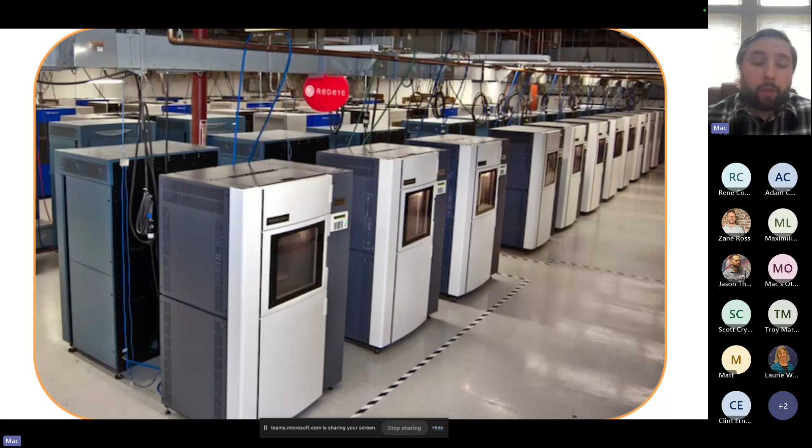So just kind of going through some of the interesting applications that I was fortunate enough to see and work on, from automotive bodies that were used in actual cars to break records of efficiency, seeing the first 3D printed castle, which was about 15 years ago over in Excelsior, Minnesota, from very large and very small products, bone structures, big fun display models, a 3D printed gun in which the majority of the components were 3D printed and have printed shot hundreds and hundreds of rounds, furniture, medical models, casting molds, robotics, full color biological products and consumer products.

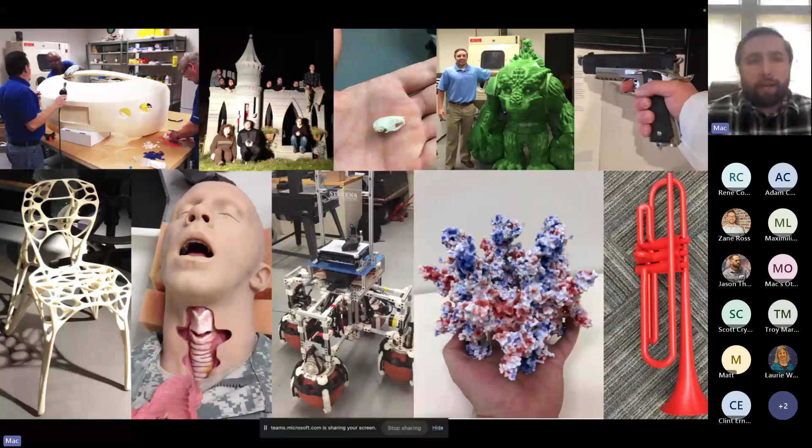So I felt like I had a really amazing opportunity to see and explore and work on different applications that, and really just learn how they were made.

To summarize the benefits of additive manufacturing, I'm sure many of you guys could come up with these as well, but for the past decade it's been: design flexibility, rapid prototyping, customization, waste reduction, toolless manufacturing.

An application of 3D printing that I always wanted to see was mass customization—the ability to launch huge amounts of customizable products at scale, and really just make it easier for the average designer or company to take advantage of this.

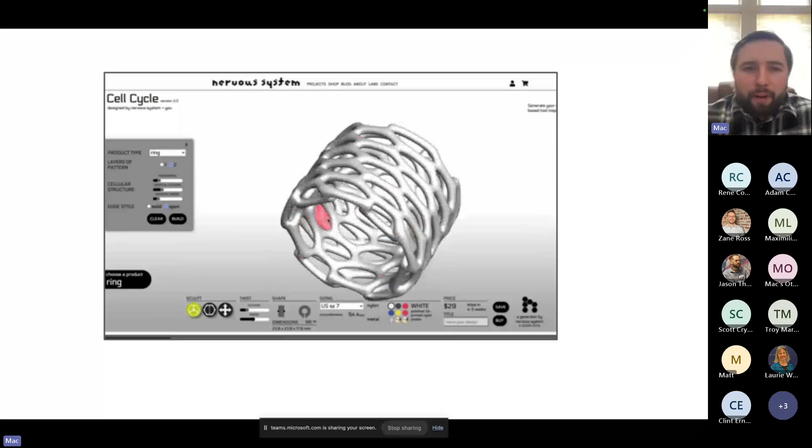One of the very early applications that inspired me to know this was possible was a group called Nervous System. This was a husband and wife out of MIT doing research, creating really interesting software that inspired me to see, wow, this really is possible.

In this model, we're seeing the modification of a few slider bars, and the model is entirely changing. It's got this organic shape, but the whole concept is you could have hundreds of thousands, trillions of combinations of this product. Everything is 3D printable, everything can be manufactured on demand.

With a little more power behind this, the price could actually change in real time, so you have this ability. I learned a bit more about this, and it turns out this is very complex to actually launch—it's not as though anybody can go in here and launch this. These were programmed products from scratch.

So I did a little more research. I was learning about the opportunities in the field and really wanted to dig into the design software, learning everything I could about the different design softwares out there.

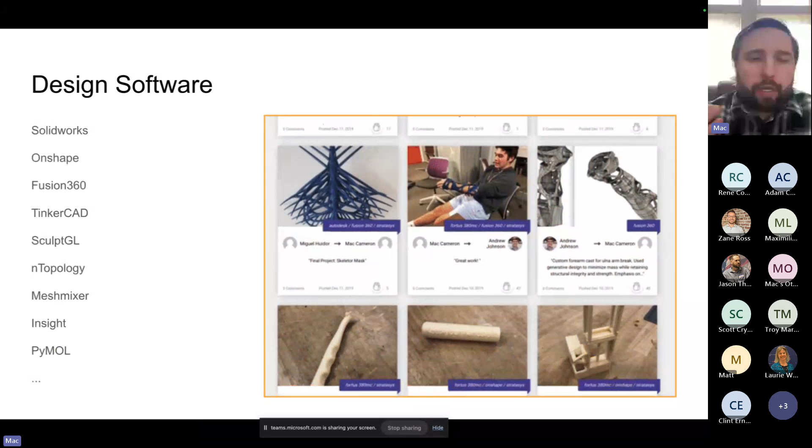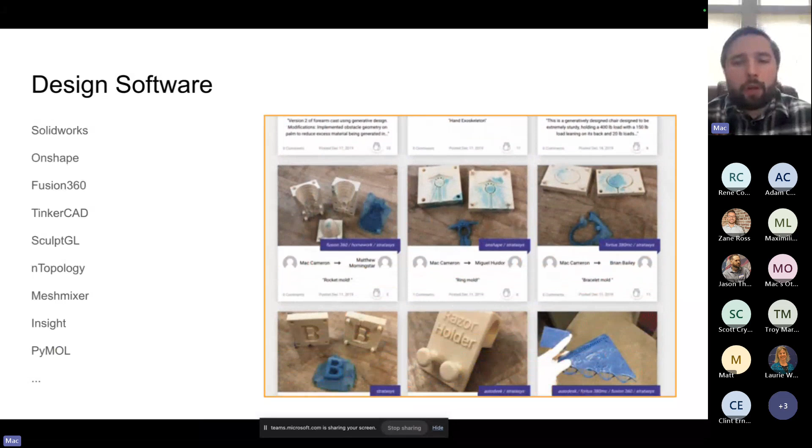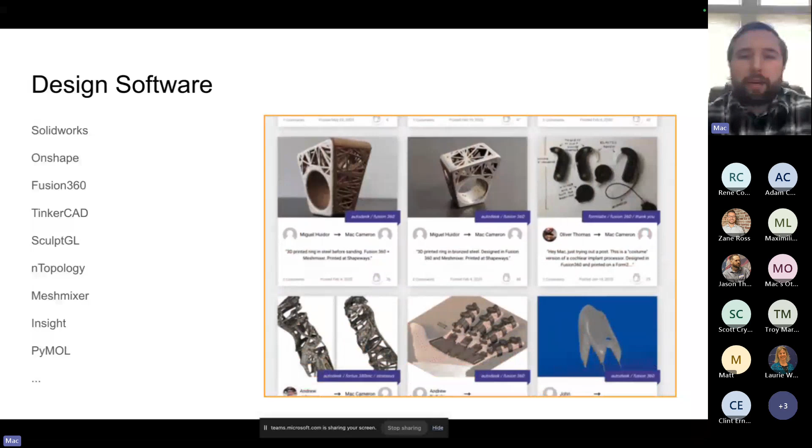I was in Boston at the time, and I had the opportunity to teach a design for 3D printing class at MIT, a semester-long course open to anybody in the college—undergraduates, grad students—where we'd go through these different technologies and softwares and try to push them to the limits to see what was really possible.

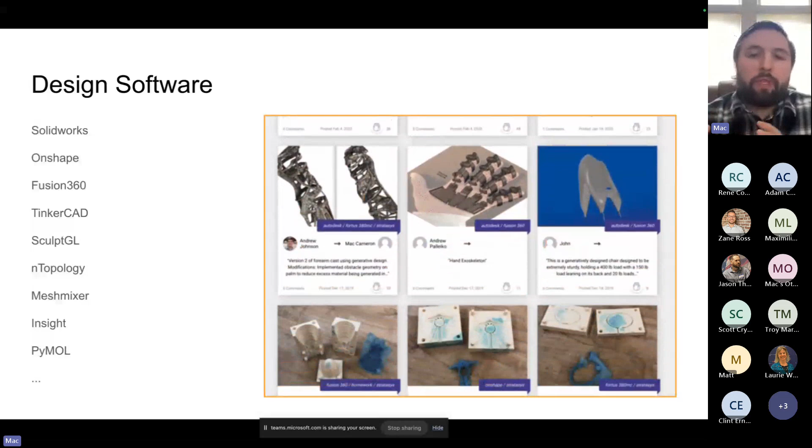So here are a few of the products some of the designers built. We have various technologies and software represented here, from generative design software to lattice structuring software to surface modeling to clay sculpting software modeling.

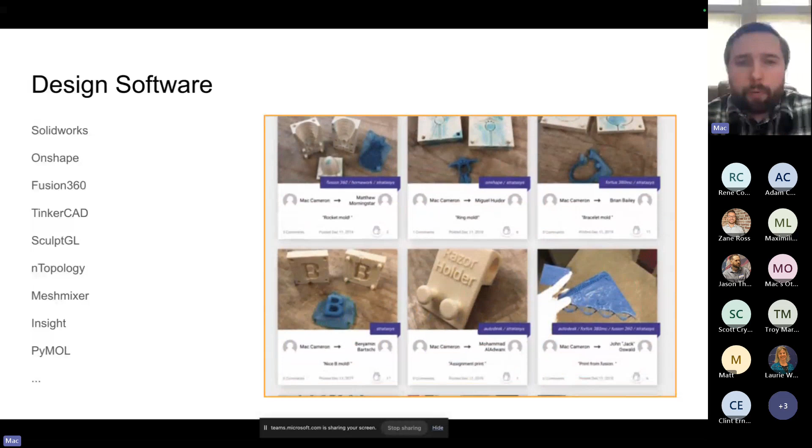The beautiful thing about additive manufacturing is once you have that file, you can make it real. And once you have that file, there's a whole host of companies out there able to manufacture these products on demand.

So me and my co-founder, Karina, drew up a really simple structure of how a mass customization marketplace would work—a way for us to quickly launch products that could be customizable and manufactured on demand. This was really the foundation of Spokbee.

You have a 3D model viewer, you have configurable products. Those products can instantly be shopped out to manufacturing service bureaus. We get the price back based on volume and complexity, then re-render that model so we see the new model and the price. You choose the quantity and material, and if you want to purchase it, you can. That goes back to the manufacturing service bureaus to fulfill, and the process stops.

So that brings us back to where we are today: Spokbee, unveiling a product in minutes, not months. To start, very briefly, what does that process look like?

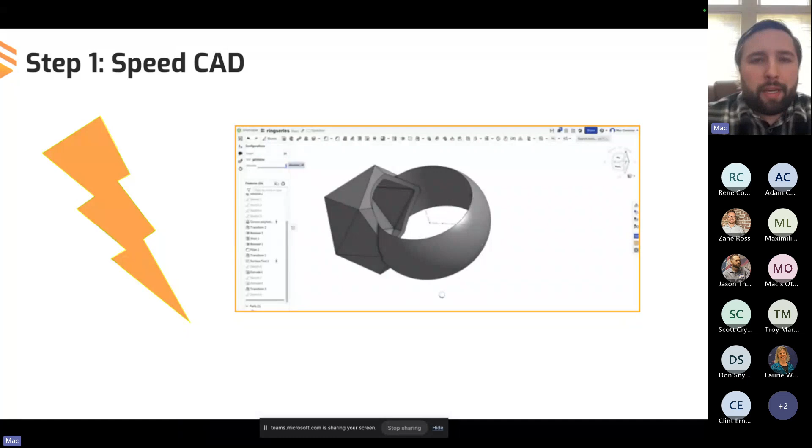Designing that part—you can barely see it here because it's a little blurry—means adding configuration variables, so every single dimension in the entire part is 100% defined. We don't have any internal geometries or surfaces; nothing is designed in a way that can't be manufactured. We have certain thicknesses that must be abided to. Everything is fully defined—having this model is the first step in being able to launch this product very quickly.

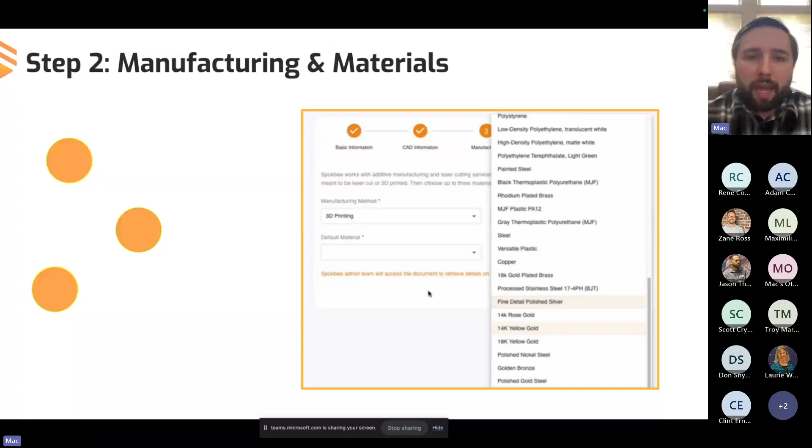This is where the Spokbee app comes in. We allow for a direct, single point of truth from that CAD model into a system that lets us price and build out a customer-facing storefront. This means choosing manufacturing method, choosing materials—whether you 3D print and then cast it out of precious metals. From there, we pull the data, the volume, the designs, the weight, the dimensions, and automate the creation of the storefront and pricing based on volume.

It certainly gets more complex than this. Not all products can be launched in seconds, but jewelry is a good example—it's actually quite complex to get the dimensions exactly right to fit on your finger, as traditional manufacturing does. As we make modifications, we're able to slide the material cost. So when somebody purchases the product, the manufacturing and fulfillment process starts through one of many service bureaus, depending on who's able to do that, materials, and so forth.

Through this process of building the interface between the CAD and the manufacturers, the digital renders, and being able to customize, we learned that manufacturers are losing money every year from a number of things that our software is really good at solving. This wasn't obvious when we first started, but became obvious afterward.

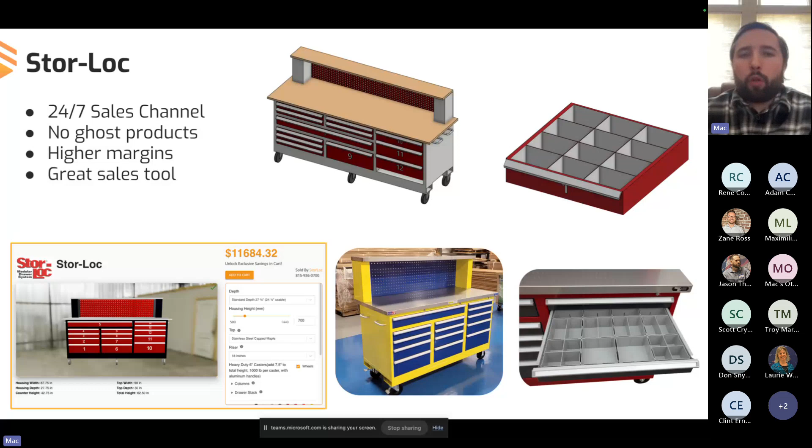Once we have the instructions and the manufacturing limitations of Stor-Loc manufacturing, pulling out the inserts, for example, is very quick to launch and create another storefront on their site. For Alba Racing, this means faster product launches, much better communication, and new product lines.

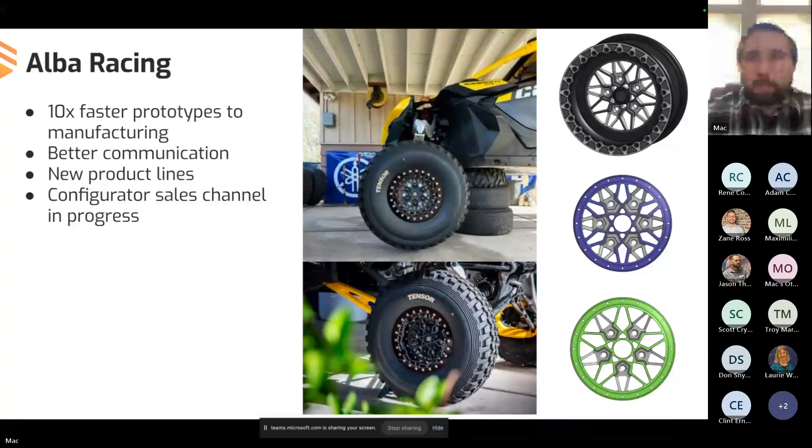Okay, so I want to show just a couple of quick demos here.

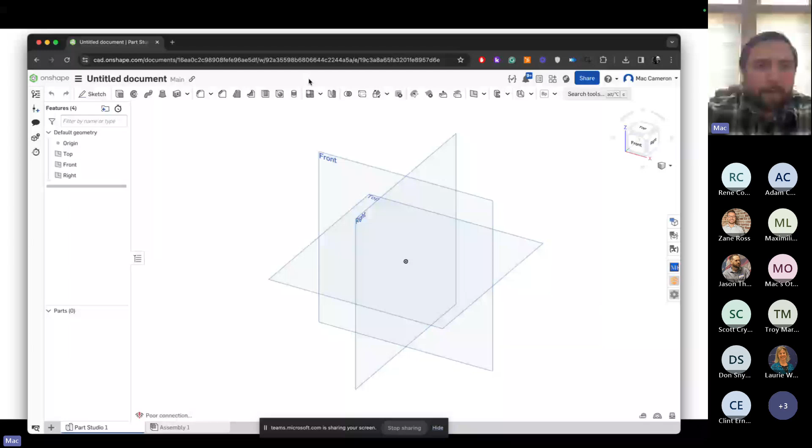Okay, so this is our engineering CAD. I'd say I'm a 7 out of 10 in terms of speed, but my team brings us up to about a 10 out of 10. I want to show you a quick interface of how the Spokbee app works, from design into storefront, and what that will look like.

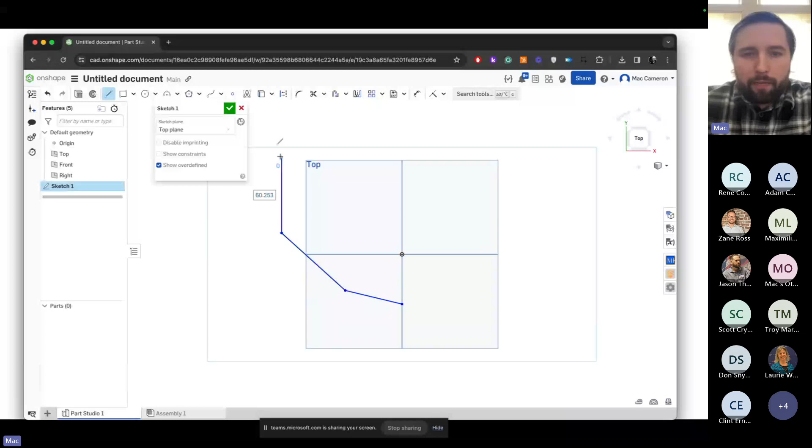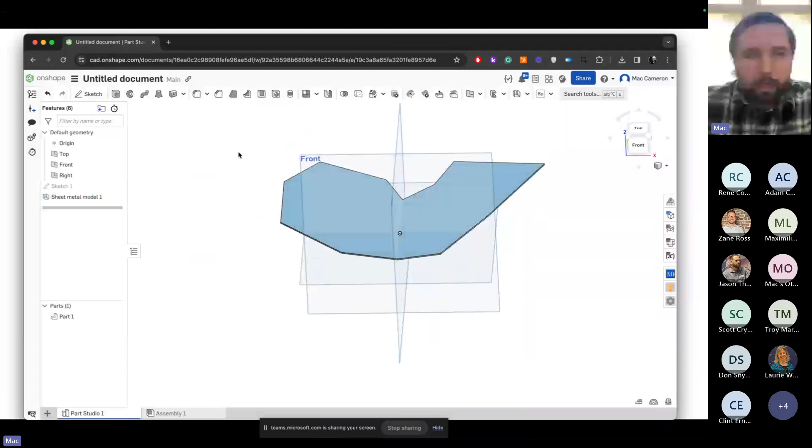So if I'm in the engineering software, in honor of Thanksgiving or Valentine's Day, I'll do a simple heart design here. I'm going to make this out of sheet metal, so I'll thicken my part—1 millimeter thickness, 1 millimeter bend radius. And I'm going to create just a few simple bends in this. Let's just do one bend, creating my bend line, and I want to bend this piece of sheet metal here.

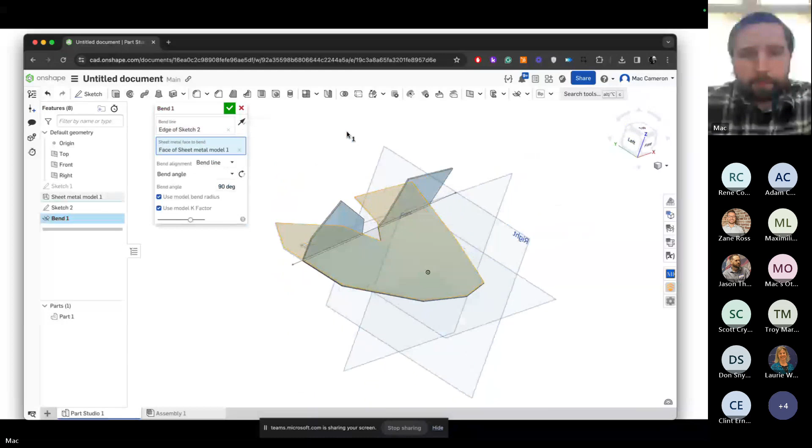So in the design, I can choose the bend radius, for example—and I'm sure you're all laughing at me saying this is the worst thing you've ever seen, but it's for the demo. What's very interesting, creating configurations to really take one product and make it 1,000 products, is being able to parametrically configure your part.

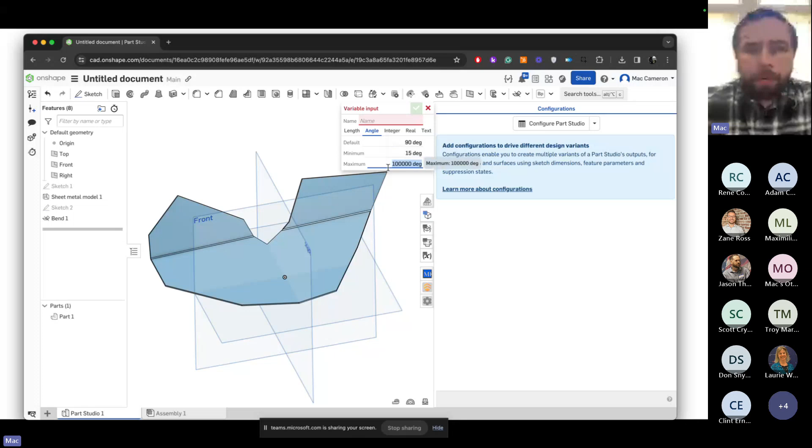So within Onshape, this is the CAD software that we built Spokbee on—we love it, it's easy, it's cloud-based, never crashes. I'm just able to do some configuration inputs. I'm going to do a minimum and maximum bend angle, and configure this part studio here. I'll edit this, and instead of saying a default, I'm going to add it as my configuration variable.

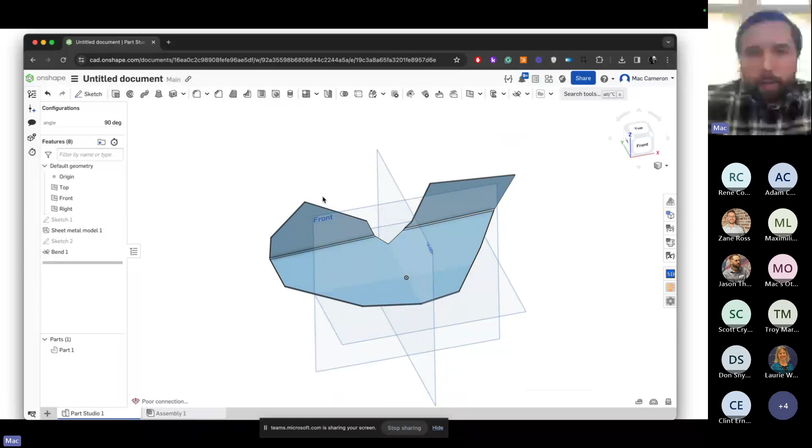Now I can take this away, remove the planes, and edit this appearance to look like this. So now as I modify the degrees of this bend, we're seeing my product quickly bending. I have a minimum and a maximum, but even if I wanted to do very small changes, I have that capability to do so.

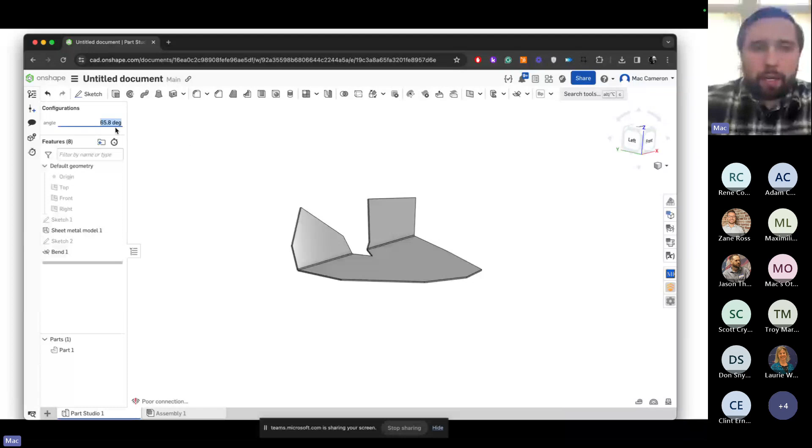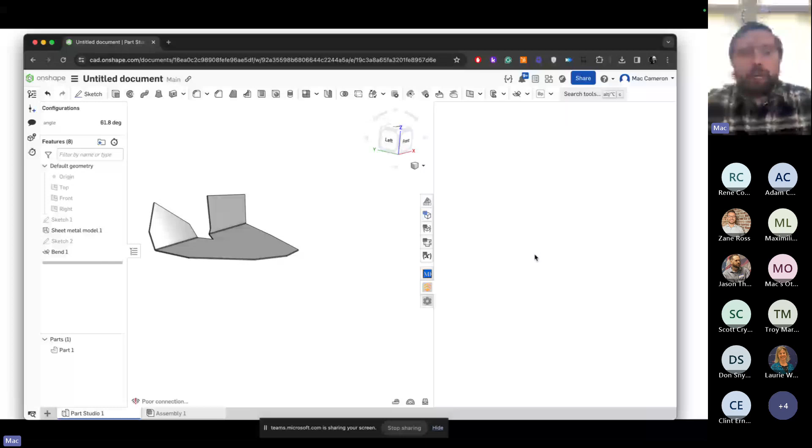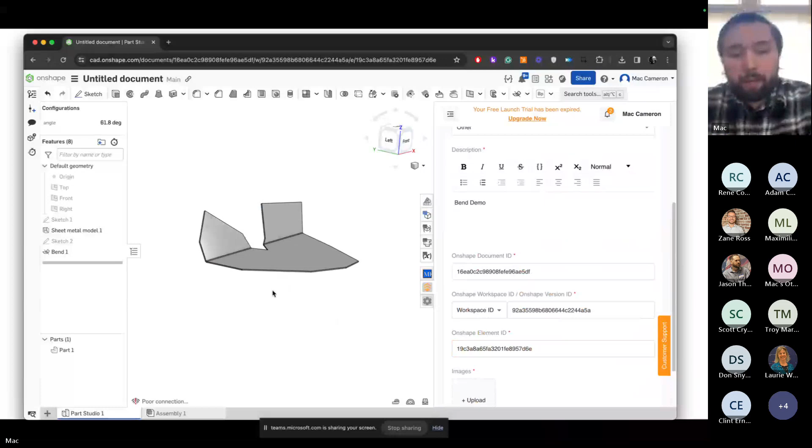So then the interface that we are building, what we're very excited about, is directly within the CAD—again, this gives us the single point of truth. I'm just going to fill in a few pieces of information. This is essentially building out an online store, which could be both publicly available or internal. Let's see this.

Just gonna grab an image, choosing the increments of a slider bar right there. Let's say I want laser cutting. I want this to be out of aluminum, just to show kind of a render.

And for public-facing documents, being able to choose a margin. So if I'm launching a product directly from CAD, again, single point of truth.

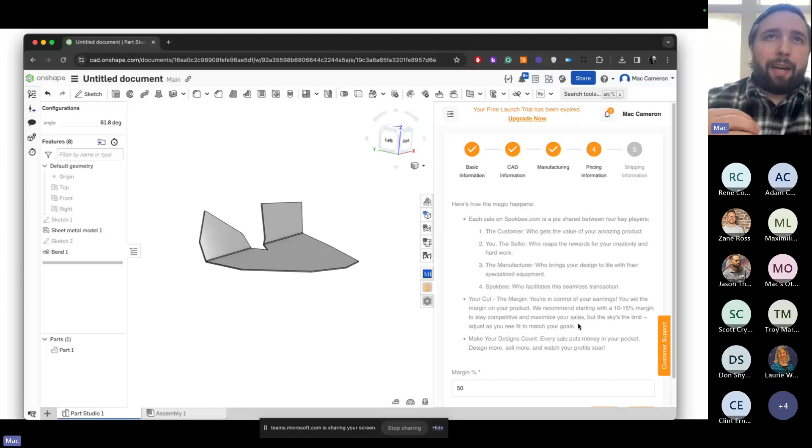There are advanced controls for pricing, but the simplest way is essentially we take the manufacturing price that we're able to get from the services. We're able to add the designer margin to it, which is here. And then Spokbee adds a commission on the parts, and the products can be launched.

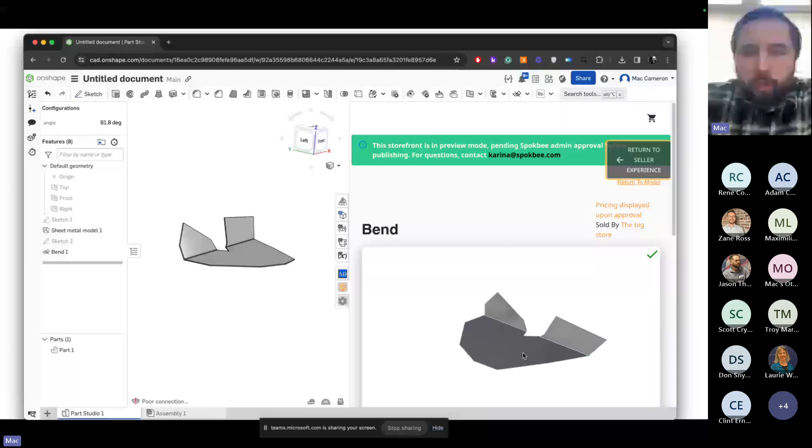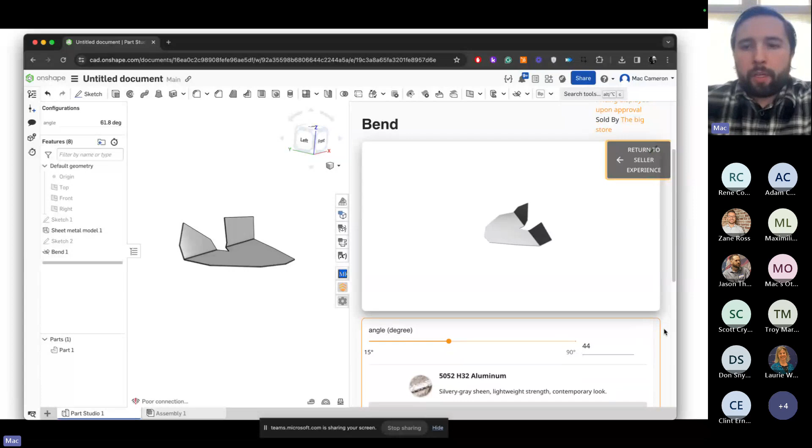So directly here, we're able to see this model. We have a more realistic render. We have the configuration variables that will update that model in real time, right? Once the pricing algorithm gets going, we get the pricing for this, and right there in real time, we're able to see a configuration and a storefront.

This ends up living on Spokbee, and again, those products can then be manufactured on demand.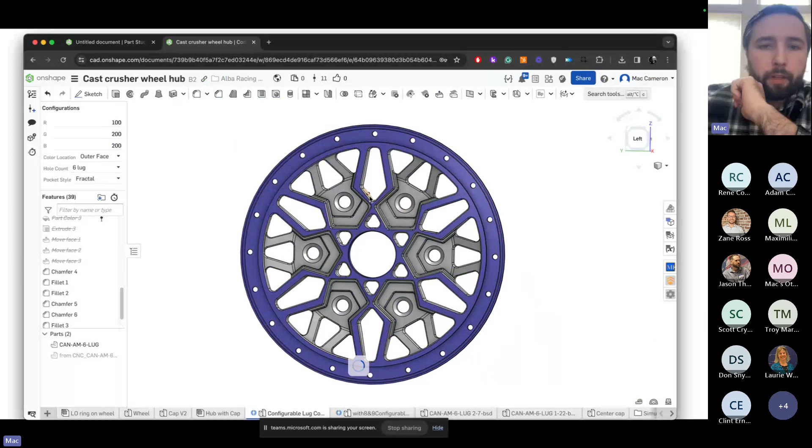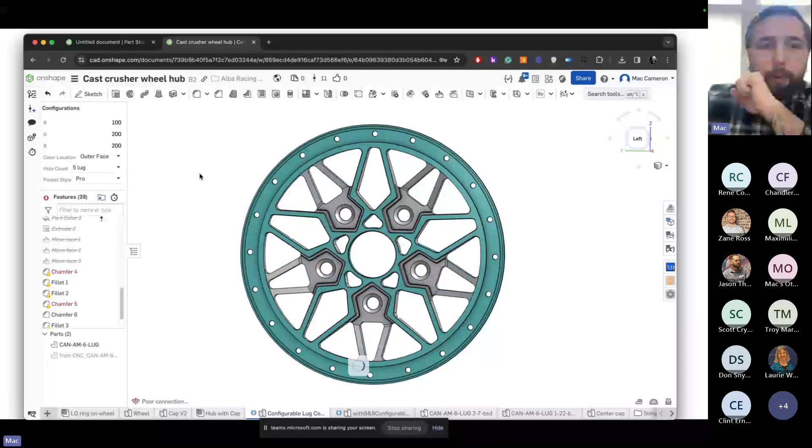Different lug counts, by having everything parametric, we're able to have 6 lug, 5 lug, 4 lug intersections within this, pocket styles of a rally pocket or a pro pocket, and various combinations of this. So again, being able to have that freedom to modify and check, and we're building a custom configurator for these guys right now, has been really awesome.

So I am going to leave it there, put a lot of information in that, but what I'm most excited to hear are just questions and thoughts.

I think we have a very powerful software and tool here, something that I wish we would have had when I was at Stratasys. A CAD link directly to the 3D printer, no bottleneck in terms of getting the files that you need that are 3D printable, consistent, and frankly, a digital asset that could last as long as you want to keep that product up. So I'll leave it there. Thank you very much, happy to take some questions.